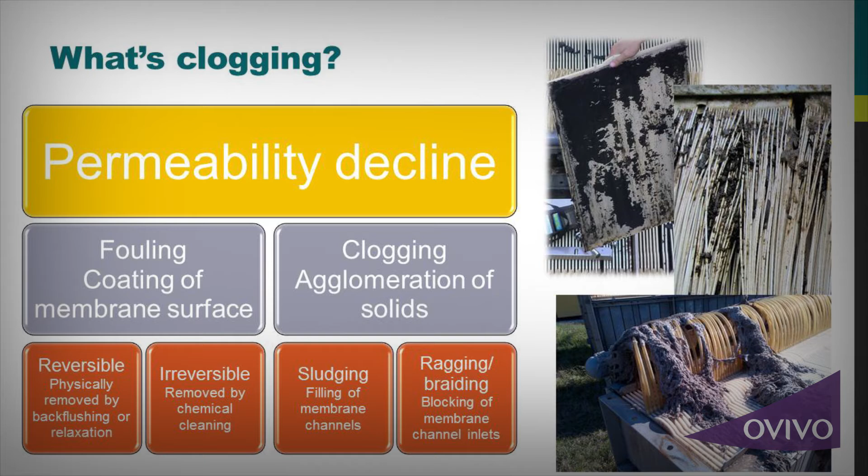And Jim, yes, I have stolen this picture from you. Sorry. And I didn't even ask permission, but look at the length of those rags. Fantastic. The amazing thing is, those rags are actually formed of little filaments which might be no more than half an inch long. And yet you're forming something which is more than a meter. Amazing stuff, more of which later.

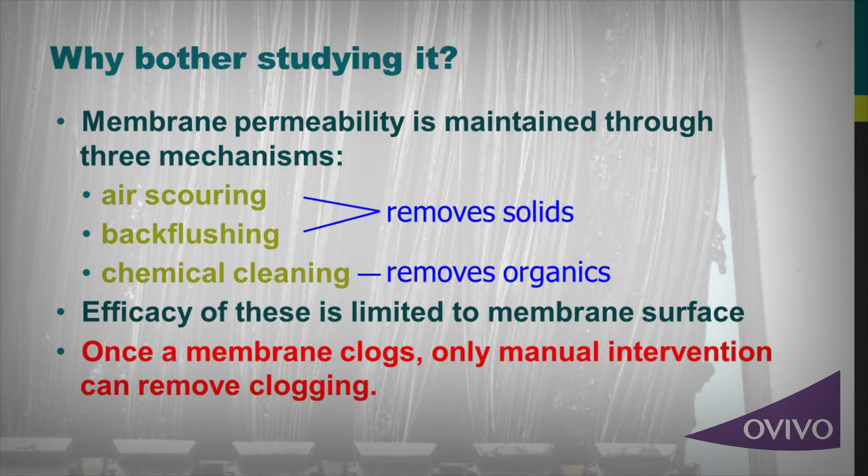Okay, so why bother studying this? Clearly, pretty much all of my colleagues don't bother. But the reality is that membrane permeability is maintained through air scouring and backflushing, which are physical mechanisms to remove solids, and chemical cleaning to remove organics. That is how a membrane process is sustained in terms of its permeability or specific flux.

But the efficacy of these things is basically limited to the membrane surface. So you backflush to remove the solids from the surface. You chemically clean to remove the colloidal species and the dissolved organics from the surface. That's what they're designed to do. But once the membrane clogs, i.e. the gaps between the membranes, and there's about a 6 millimeter gap between one membrane and the next in a flat sheet module, once that becomes filled with solids, what happens at the surface becomes completely irrelevant, because the water can't even get to the surface of the membrane.

So it doesn't matter whether you've characterized the extracellular polymeric substances into carbohydrate and protein, and whether you have biopolymers and what sort of species you have and what their molecular weight is and how they charge, react, and all those other things and solvation forces. It doesn't matter, because the water's not even getting there. And to make sure it gets there, we have to address the issue of clogging.

So, how do you study clogging? Well, the short answer, friends, is with great difficulty. And that gives me a little clue as to why I'm the only person that actually bothers studying it. Because I'm pretty stupid, and I like to make life really hard for myself as often as possible. It is quite hard. There isn't a standardized, accepted methodology for quantifying clogging. Naturally, most academics don't even realize it exists, so having a standardized method is some way off. But we do have little things that we can do to try and quantify it.

Certainly, as far as the published research in this area is concerned, and remember, there's only 10 papers, so it's quite easy for me to summarize them, particularly as I'm the co-author of nearly all of them. But the efforts thus far have comprised gravimetric analysis, which is just weighing it, basically, of solids which have been extracted from the membrane. And that was done by Buzatu et al. She is now at Qatar University.

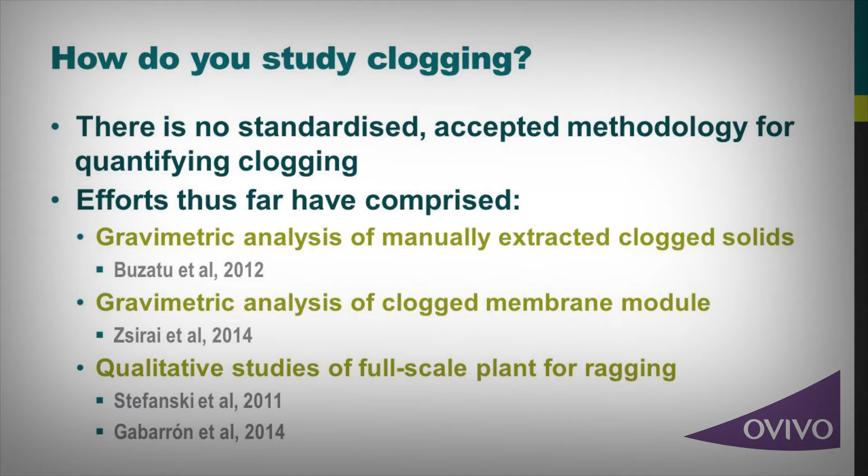There's gravimetric analysis of clogged solids within the membrane module. So basically, you just weigh the membrane module before and after it's clogged. That was done by Zsirai et al., again at Cranfield. And then we've got a number of qualitative studies for ragging, and that includes Stefanski et al. and indeed Gabarrón et al. So these are some pretty key papers in this area. And as you can see, there just aren't that many of them.

So looking at the work at Cranfield University, these were all done at pilot scale. They're all done on hollow fibers. Basically, it's just because those are the guys that gave us the money. They were only interested in hollow fibers, so that's what we investigated. But the same principle will apply to flat sheets in terms of the methodology.

In situ determination. Basically, this is the easy way. This is the Tamas Zsirai way. He doesn't want to make life too hard for himself. He just used one of these, a very sensitive load cell. So given that the module itself weighs, I don't know, maybe a quarter of a ton or something like that, then you need a fairly sensitive load cell in order to weigh the difference between the wet module and the wet module with the clogged solids.

So it's a bit rough and ready, but it's a damn sight easier than the ex situ method, which involves extracting the solids from the module, which is very, very accurate, but for that you do need this, i.e. 2 visiting students at Cranfield University.

So they arrive sometime in June, and they say, what am I doing? Well, the good news is you'll be working in MBRs. Yay! For Simon Judd, yeah! And you'll be extracting shit from modules for 3 months manually. Yeah, I still get their hate mail.

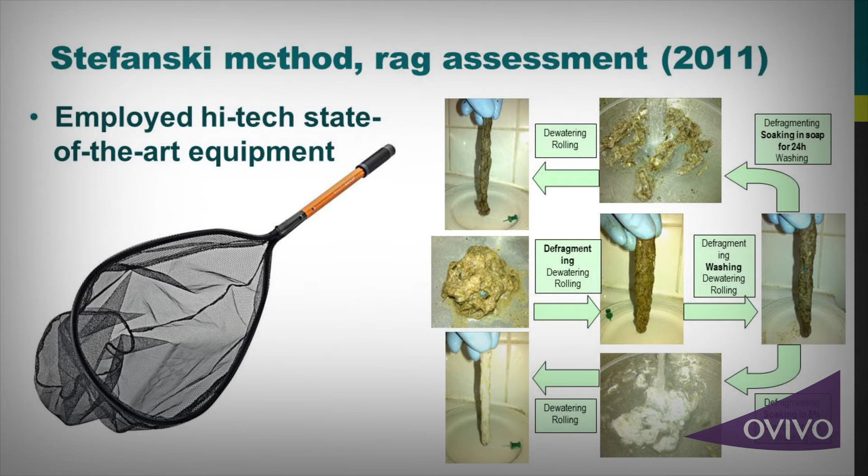If you hit something with hypo, you dissolve all the hair. So people, if you ever want to dye your hair, don't use bleach. Just a bit of advice there, because bleach does actually dissolve hair if you leave it overnight. If you do that, you end up with a nice white material. Wash that again, still forms a rag. So basically, the idea that rags might be formed somehow from human hair is not true. It does seem to be some sort of textile material, and everything points to cotton wool as being the beast responsible.

So, taking that theme a little bit further, at Qatar University, we've just been looking specifically at rag formation, and just using a completely made-up method, which seemed reasonable to us.

So, what this involved is it's basically a gravimetric measurement. You add a cotton wool standard, and indeed we've managed to get hold of some real rag samples from a UK MBR in the Wessex region of the UK. We've also taken some lint from laundering, so you basically just take the filter out from your tumble dryer. I took a handful of that and shipped it off for doing this test.

The sample preparation, basically, you have to cut the material into lengths of less than 5 millimeters, because you have to figure that anything that arrives in the membrane tank has gone through a 3 millimeter screen. So you can't really have lengths more than 5 millimeters. That's kind of the premise that we've used.

Cutting up cotton wool into 5 millimeter lengths and then trying to isolate each individual fiber is impossible. Well, it's not impossible, it just takes a long time. So guess what you use to do that? Yeah, students. So that's what they've been doing.

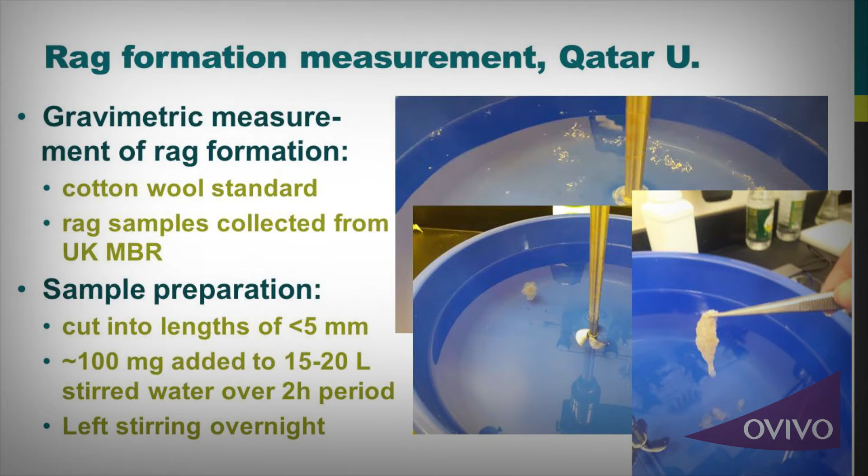So I think that's Pompilia's hand removing these fibers. She's very, very protective of her rags. She likes to try and remove as much as possible without it falling apart. Very, very protective. It's probably the closest she'll ever come to having children, is to have these rags that she gently pulls out.

So essentially, you can form these aggregates from this completely dispersed bunch of fibers that you're adding to the tank, which I just find fascinating. You can add something completely dispersed and it just forms one aggregate. If a coagulant could do that, any other process would be dead in the water. But these fibers do actually aggregate to form more or less a single rag.

53% rags. The second time we did it, it formed rather less rags. Same stuff, same cotton wool, slightly different behavior. The sample that we pulled from the Wessex Water MBR ragged like crazy. So clearly, there's something happening which causes rag formation. The rag formation is really quite significant. We've got very low concentrations, yet it forms just a single rag.

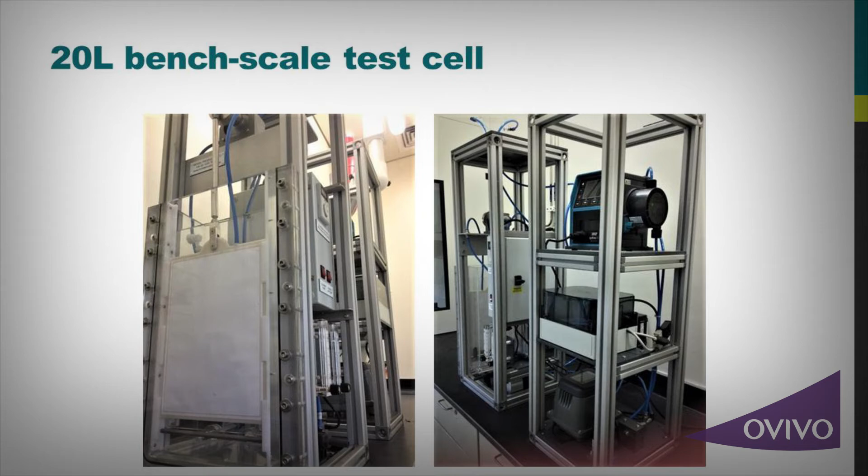Okay, that's enough of ragging for the moment. We're going to move on to clogging now. This is a little bit more involved. This is the test that we've used for that. Essentially, it is just a single A4 size membrane panel which has a viewing window into it, so you can actually see what's going on in that panel. And all we're trying to do is clog the channel. There's a 6 millimeter gap between the perspex wall and the membrane.

So, first of all, a little bit of background into the science of fouling. Fouling is normally measured by the dP/dt pressure gradient, the rate at which the pressure increases at a constant flux, something which I'm sure you're familiar with if you're on your plants. And that follows the relationship of pressure incline rate equals some value multiplied by the exponential of the flux multiplied by a second value. It's a classic exponential relationship.

And what it means is that when you plot the pressure incline rate against the flux at various flux values, you get a straight line if you have a logarithmic scale on the y-axis and a regular scale on the x-axis. We used two different types of sludges because we had access to two different types. One was industrial, one was municipal. And you can see, and this is obviously intuitive, the industrial has a higher fouling propensity, a higher value of this fouling exponent than the municipal.

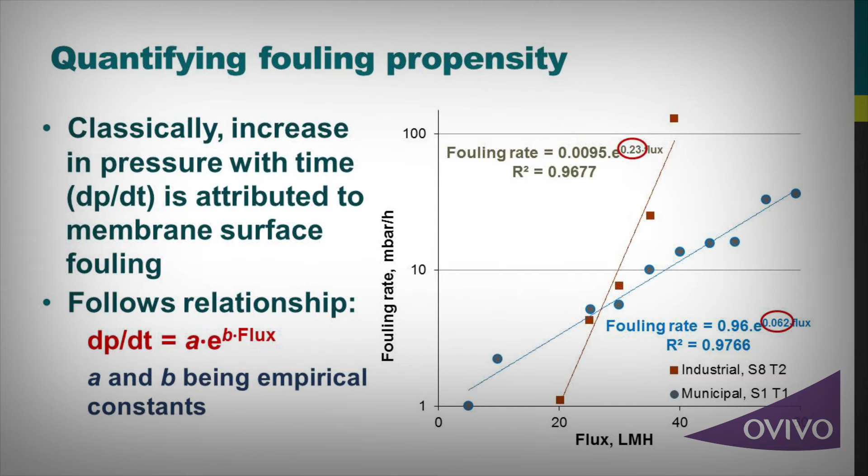Absolutely to be expected. And we did these correlations basically because you need to benchmark against something, you have to sort of make other academics feel comfortable, and this is the kind of stuff that they're used to. But it does give a measurement of the rate at which the pressure is increasing or the rate at which the permeability or specific flux is declining. So it's a good benchmark to have.

As far as clogging is concerned, well, this is completely new. You are, in fact, the first people to be told this apart from our collaborators. What we've done is operate at a constant flux, so we're operating that cell I showed you earlier under constant flux conditions, operate it for an hour or something like that, drain the membrane channel to reveal the clogged solids, and then photograph it. You then reload the reactor with the sludge and just carry on.

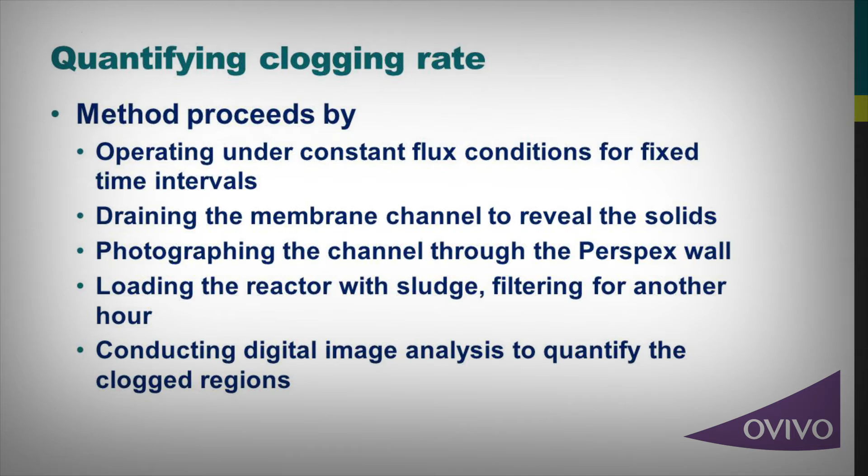Stop for another hour, stop the next hour, take a photograph, carry on. So it's just a repeated thing until you've got to about 4 hours and it's time to go home. And for each time you take the photograph, that image has to be processed in order to quantify how much of that channel is filled with solids. It's probably easier just to demonstrate it.

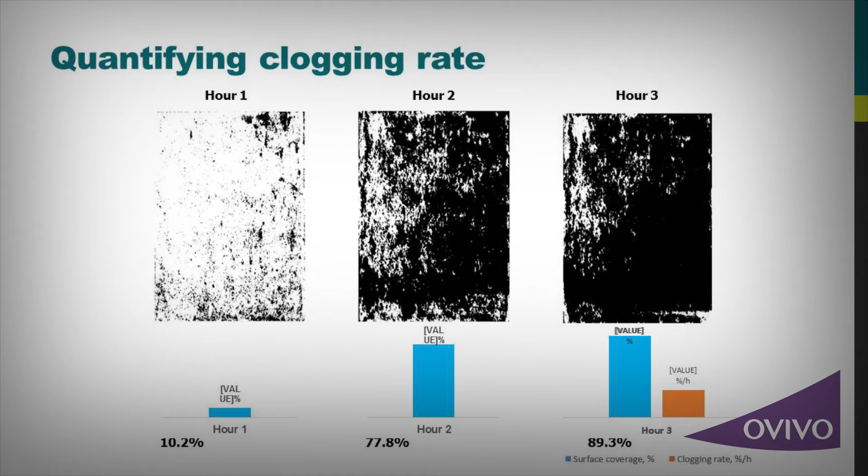So you stop after an hour, you end up with this kind of pattern. When you digitize it, it's then much easier to differentiate between the unclogged areas, the white area here, and the clogged areas, the black area. So apparently about 10% of that A4 panel has been coated with these brown solids. It goes up quite quickly in the second hour to 77.8% and then to 89.3% in the third hour.

And you can work out the clogging rate from that just by dividing by time. So you get a rough indication. If you always run to the same time, 4 or 5 hours, then you can get a rough indication of how fast the membrane is clogged. So you've basically got two key parameters. The clogging rate, how fast the membrane is being clogged, and the fouling rate, the rate at which the pressure increases with time with flux. So one is kind of a measure of fouling, provided you haven't got any clogging, and the other is a direct measure of clogging. So those are the two key parameters we're looking at.

In the actual tests, we did 3 campaigns altogether, used industrial sludge and air scoured it under normal operating conditions. The industrial sludge, as you will see, is the most challenging in terms of its operation. We had industrial and municipal sludge with no air scouring, so effectively we're really encouraging the system to clog because that's what we're trying to find out about. You still have a little bit of what's called shear in the system to allow the water to pass through the membrane, but if you haven't got any air, that shear is much lower.

Shear is basically this. If I've got a flat surface here and I've got water or a fluid flowing across it, by doing that, I'm generating shear at the surface. It sort of manifests itself in a slight change in the temperature when you do it with your 2 hands. But that's all it is. That's what shear is. So those are accelerated clogging tests.

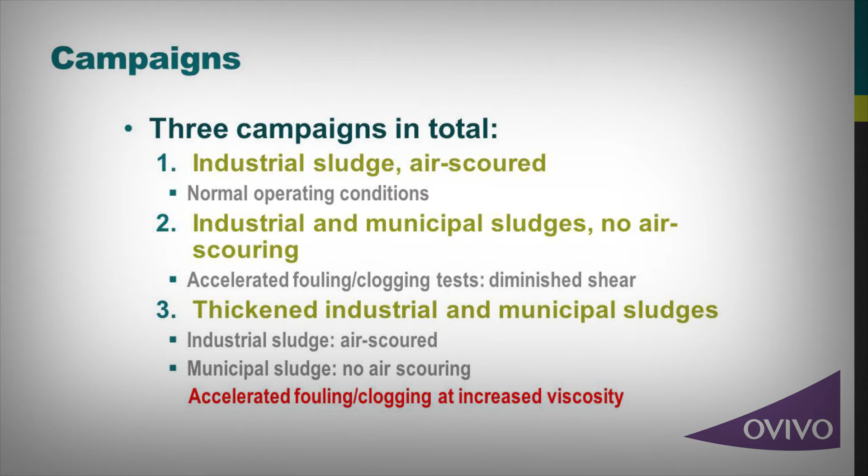And then we thickened the sludge up and did the same thing both with and without air. So essentially, we are encouraging clogging by doing this. So a lot of these results that you see might look quite horrific, but basically we are forcing the system to clog so that we can study it.

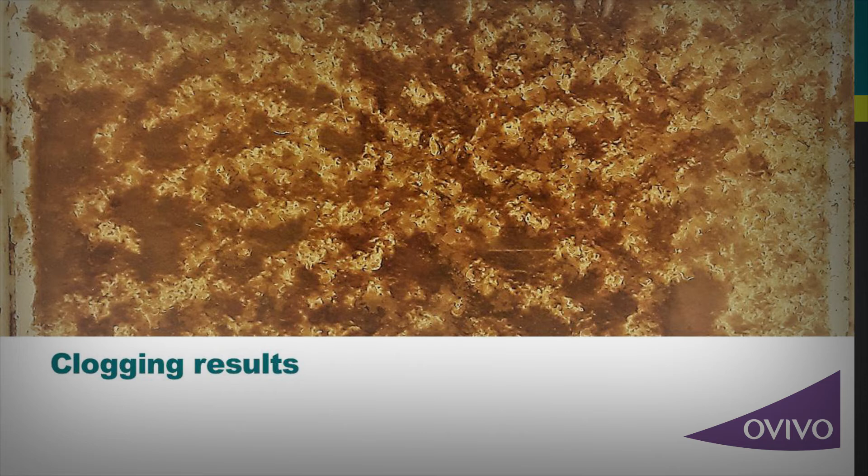So here are the outcomes. First of all, the key measurement that we did was the rheology measurement. Rheology is basically how viscous or gloopy something is. For something like water, the viscosity doesn't change with anything other than temperature. So it doesn't matter whether I'm shearing it at this rate or at this rate. The viscosity stays the same.

Thing about sludge is it's not like that. The viscosity changes with shear. This is a very, very well-known thing. Some of my academic colleagues who study sludge rheology, they go mad for this, how the viscosity changes with shear. And it is actually quite important. If you're trying to pump sludge, then you really have to know that kind of stuff. Because if you get to a point where the viscosity becomes very high, your pump's not going to work. So actually, sludge rheology is something that's worth investigating.

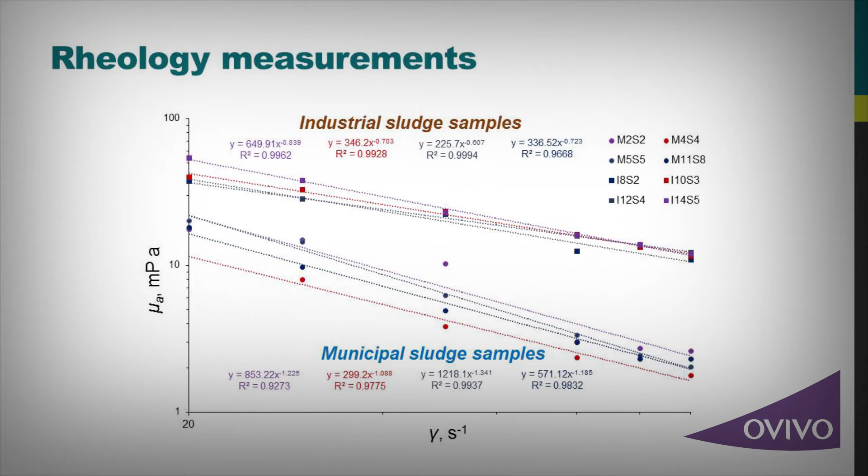And what we did with this extraordinarily expensive rheometer that we just happened to have in the department was measure the viscosity with shear. Doesn't really matter why this is, but the net result is if you just pick a whole bunch of samples, you get this kind of behavior for the municipal sludge and this kind of behavior for the industrial sludge. So if you get up to this point here, that's about 120 per second shear rate, which is kind of representative of what you might find in a regular MBR. Those are the sort of shear forces that you'd expect. Then you can see there's a massive difference in the viscosity of the industrial sludge and the municipal sludge. So this is just a characterization thing. And I'll come back to the significance of this a little bit later.

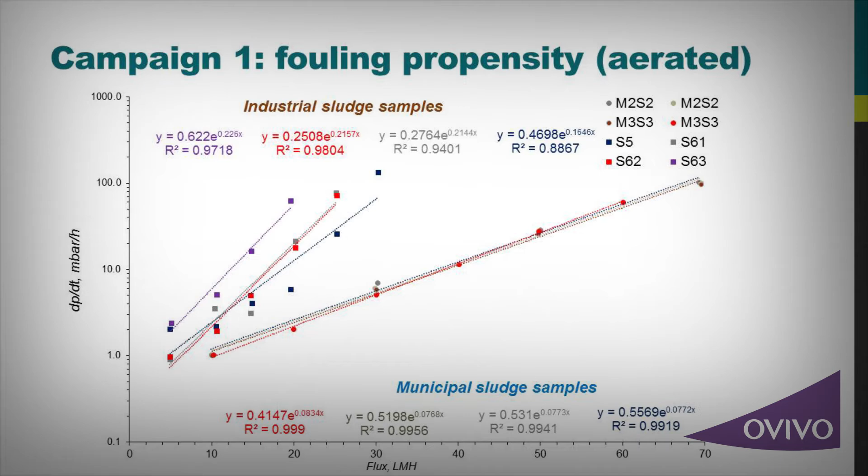Then there's the fouling stuff. Now remember, the fouling propensity or the fouling exponent is just that number in the equation which represents how rapidly something fouls with flux. So it's just a number to give you an indication of how bad the fouling is going to be. And again, you get two different sets of behaviors for the two different types of sludges. In essence, the industrial sludge is more highly fouling than municipal. The key thing is you take the gradient of this line and you've got a number which then quantifies the relative fouling propensity of the two sludges. So we've got one sludge which is pretty benign, the municipal sludge, and we got one sludge which is pretty difficult. And we're just trying to compare the behavior of the two.

Okay, CST. Hands up if you know what CST stands for. Anyone at all? Oh yeah, well, creepy head in the front row here. CST is a real cool measurement. It stands for capillary suction time. You can just buy a little machine, a couple of $1,000s, I suppose. I'm not sure how much it would cost here. And it gives you some indication of the dewaterability of the sludge really quickly. It's a very portable thing. It's not huge.

So what we did was plot some of these things, the fouling exponent, against key quantities, namely the CST. An awful lot of sludge characterization is based on CST and SVI. CST is kind of more useful, so we went with that one. And as we would have expected, without going into too much detail, the longer the CST, so the more time you need to dewater something under these specific test conditions, the higher the fouling rate. Absolutely typical. Same sort of thing, not quite as good a relationship with the COD, the soluble COD.

We normally reckon that all of these things which foul the membrane, the EPS and the carbohydrate fraction of the EPS and the SMP, that's the soluble microbial product, and all these other things, they're basically organics. So if you've got more soluble organics, you've got more fouling. And again, this is kind of indicated.

I forgot to mention we've got two different flows of air here. So when you apply air, you have a lower fouling rate than when you don't apply air. Again, it's one of those no shit Sherlock things. It's fairly obvious if you apply air, you're going to get less fouling. But we did it with and without air. And again, the industrial ones are more highly fouling than the municipal ones, and it could possibly be associated with COD. Okay, so we've done the scientific thing, we've plotted this against that, and it's pretty much as you would expect.

However, and this is one important caveat, if you look at the way in which the different sludges foul or clog the membrane, there is a distinct difference. So this is the municipal membrane. This is the membrane which has been challenged with municipal sludge, and the sludge is coating the membrane. But basically that is just a cake. It's not actually filling the channel. It's just a thick layer of foulant, if you like, enough to cause you a few problems. But chances are, if you applied chemicals, that would be removed.

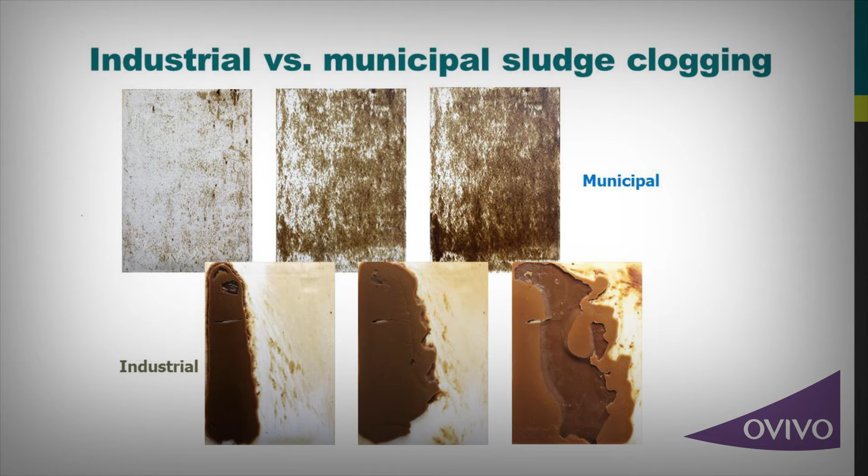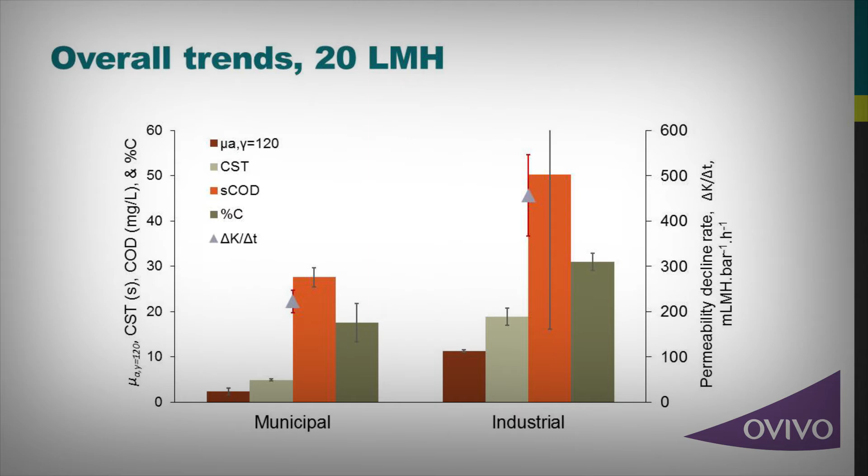So in order to do a straightforward comparison under fair conditions, we looked at trends at a fixed flux of 20 LMH, and we found that pretty much everything increases going from the municipal sludge to the industrial sludge. The viscosity, how gloopy the sludge is, goes up. The capillary suction time, how dewaterable the sludge is, also goes up. The soluble COD goes up. The clogging rate, which we're calling percentage C, goes up. And lastly, so does the rate of permeability decline, or specific flux decline.

It looks very nice, you know, I like the color scheme, those are my colors, I like to think.

But all that graph tells you is that industrial sludge is more tricky than municipal sludge. There's not many people out here that wouldn't be able to tell me that without me showing you a graph. So that doesn't take us much further as to why things sludge, and critically, does it relate to fouling? Because if academics are spending their lives, or forcing their research students to, studying something which doesn't relate to one of the main impediments to MBR operation or implementation, they are wasting their time. So let's dig a little deeper.

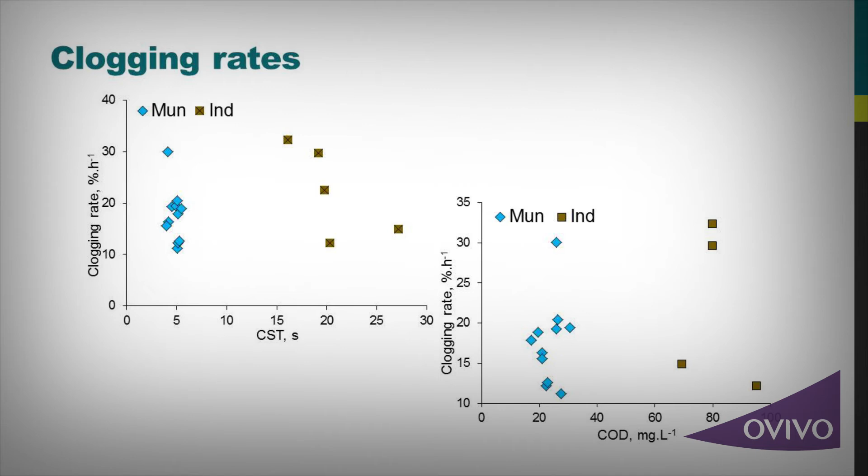First of all, if you plot the clogging rate data against CST and do the same thing with COD, there is absolutely no correlation. For the fouling rate data, that's the rate at which the pressure increases with flux, there is a correlation, roughly. For clogging, it's all over the shop, completely random. So you can't really say that clogging relates to fouling, not from those plots. So what does it relate to?

To do that, we had to take one more variable and change the solids concentration itself. Because if you increase the solids concentration, a whole bunch of things are going to change as far as the mechanics of the system are concerned, like the viscosity. But the soluble chemicals should remain the same. If the soluble chemicals are at the same concentration, fouling shouldn't be affected. So if there's a change, it must relate to the physics of the system and not the chemistry. That's basically the way we were thinking.

So this is the money shot of the whole thing. What happens when you change the MLSS from 8 to 12 grams per liter and go up to 15 to 22 grams per liter? There's not a lot of control in some of these numbers, but those were the ranges. And we're looking again at viscosity, the capillary suction time, the soluble COD, which represents this surface fouling all my colleagues are obsessed with, the clogging rate at U equals 0, that's with 0 aeration, the clogging rate when we aerate, and this fouling exponent value.

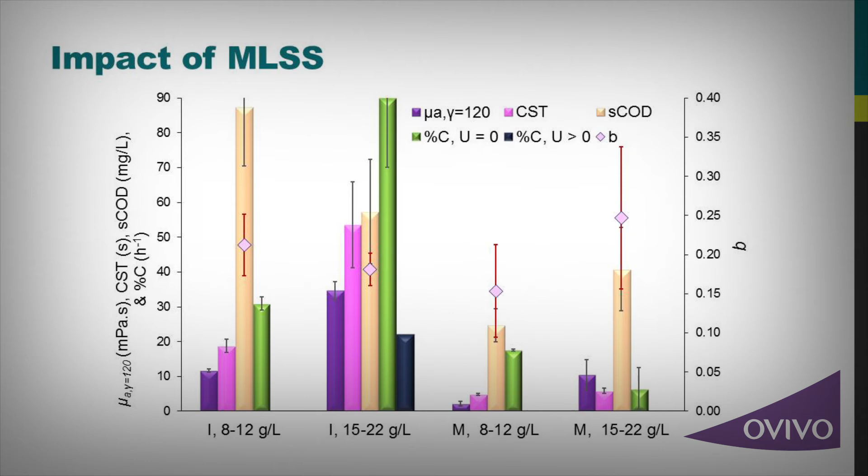As far as the fouling is concerned, this is the pressure incline thing that I told you about before. So the pressure incline rate's hardly affected by clogging, which is odd. But the municipal, which isn't really clogging properly at all, you do get a change in fouling. So basically, fouling doesn't equal clogging.

It means when you're sitting there scouring the outputs from your, I forgot what it's called now, SCADA, and you're looking at the pressure data, you can't actually tell whether any change in pressure is associated with clogging or fouling.

The only way you can tell whether you've got clogging, really, is to see whether you get a recovery after your CIP. If you don't get a recovery after your CIP, you might have some really strange fouling going on, like the guys yesterday that had that sort of inorganic fouling, which is still quite rare, I think, to get in a regular municipal MBR. Or chances are it's clogged.

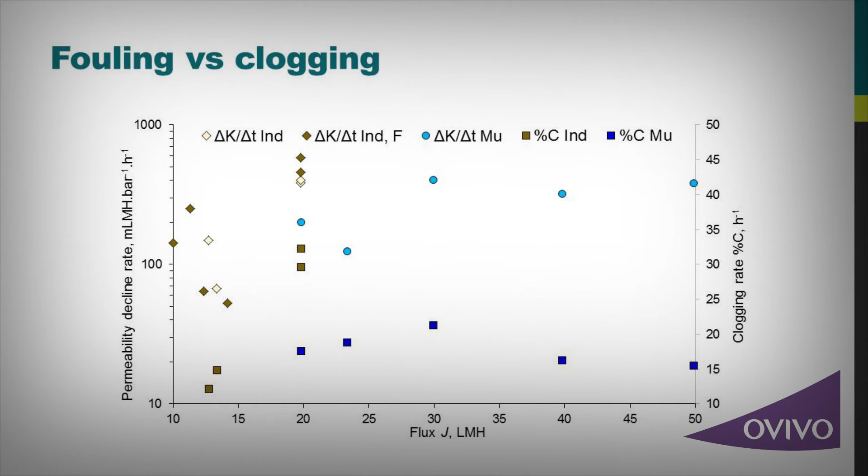So as I said, CIPs are designed to remove surface fouling, and they're very effective. But if you get clogging, I'm afraid your CIP just ain't gonna do that much. So basically, clogging doesn't relate to soluble COD, so it doesn't really relate to fouling. So this fouling exponent, which we use to quantify fouling, doesn't relate to the clogging rate.

There is some indication of impact of clogging by the CST or the rheology, but it's obviously a very complicated thing. Just because you have high viscosity or high solids doesn't necessarily mean you're going to get clogging. So why does it happen?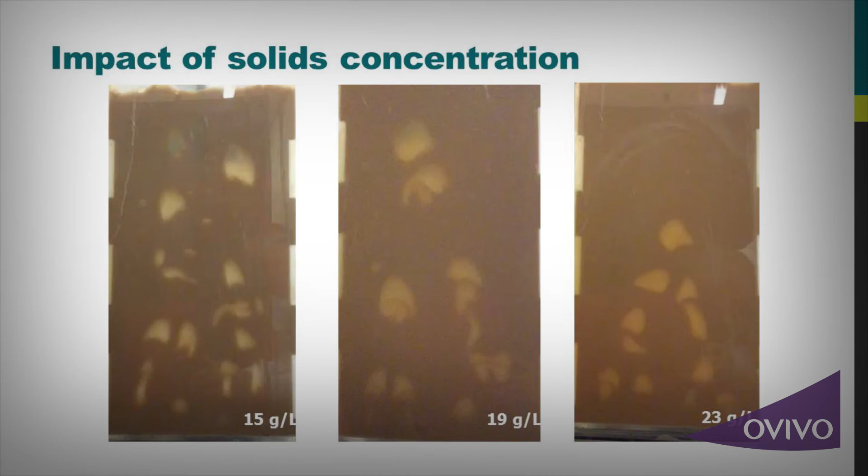Also, if you squint, you can probably see that the bubbles for the low concentration are more or less scouring the whole width of the channel, whereas at the two higher concentrations, they tend to sort of disappear up to just one part of the outlet. It's probably easier to see when you run at regular speed like this. You can see they're sort of disappearing up to one side, or more or less through the

center of the channel. And that's manifested in taking a look at the channel at the end of the experiment, where you can see that clogging tends to happen at the sides, and also this center bit between two holes of the aerators. So it's pretty much as you would expect. You're getting clogging in line with the aeration pattern. What then causes the aeration pattern?

Well, it is actually known that if you have high viscosity fluids, the air bubble stream tends to constrict. This has been known for about 10 years. There's a company called Praxair who looked at this. The researcher was a guy called Malcolm Fabiyi, and he showed his results at WEFTEC in 2008. So it is known that if you have very highly viscous fluids, it will affect the aeration.

What causes high MLSS? Well, it's some fairly obvious things. If you don't waste, your solids concentration will go up. If you decrease the recirculation rate between the membrane tank and the process tank, again, the MLSS will go up. If you increase the flux, same thing. If you increase the organic load, you'll grow more MLSS, and as a result of that, the solids concentration goes up. So you could say a simple message is control the MLSS and control clogging.

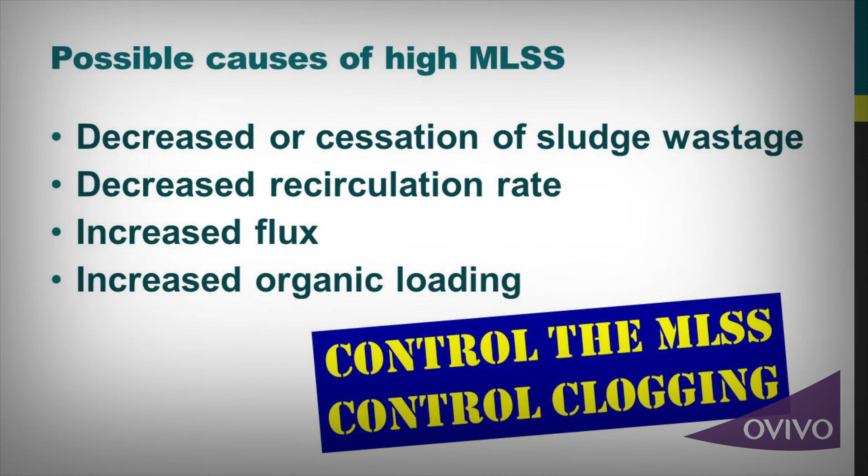It's not quite that simple though, because the nature of the sludge, the fact that industrial sludge is just a different animal to municipal sludge in our experiments, will also affect clogging. So basically we've gone a little bit further with understanding clogging, but there's really a long way to go. It's very, very lonely studying MBR clogging, and we could do with a few more researchers looking into it.

So the ragging stuff, well, we need to actually analyze rag composition to see whether it really is just cotton wool, which is the main offender when it comes to ragging. Clogging, there's all kinds of stuff we need to do to try and understand it further. One of the things is to actually completely control the shear rate by doing it mechanically, and we're able to do that with our test.

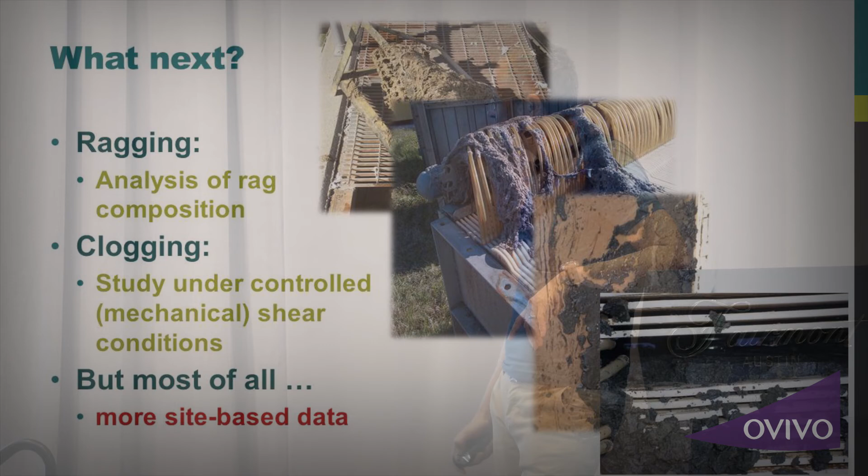But most of all, more site-based data, because essentially we can't really hope to understand something as complex as ragging and clogging unless we have more information from individual sites to try and pull out the rags, try and understand the nature of the way in which the sludge flows, and then use that as the basis to further knowledge. And of course, for that, guys, it's over to you.